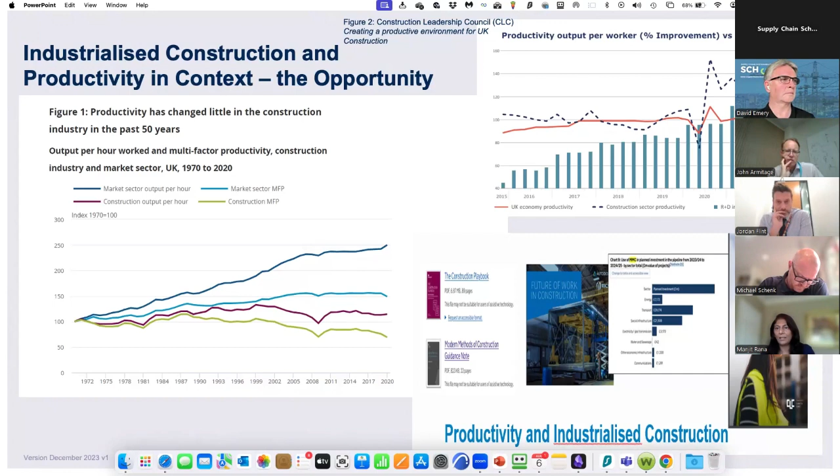Thank you, David. The second thing I wanted to go into a little bit around the whole productivity and industrialised construction piece is one of the issues we have, having the industry that we have, which is large and covers lots of different types of infrastructure. We need to set the right environment to be able to adapt to industrialised construction and bring modern methods of construction in. So the CLC have picked out 3 key areas where we need to work differently.

The first one is around people, culture and mindset, and moving away from the traditional way of doing things, thinking more widely around how value is contributed at each stage of our process, each point of our value chain. The second one is that we need to really embed our best practices and drive continuous improvement.

One of the areas where we can probably do better and need to be more adaptable is around extrapolating all the good innovations we have in our industry and putting them out to other projects, and not just stopping project by project, but really thinking and challenging ourselves about whether we're taking things into other projects and thinking programmatically.

And the third one is, at what point are we adding the value? Do we really understand our value chain and our end-to-end process? Are we bringing the innovations in at the right point? John's going to tell you a little bit more about this later on, in terms of whether we're bringing all the innovations in at the design stage, and whether we're looking and optimizing those areas where we can bring modern methods of construction in at the right point - or are we losing value, and at what point are we losing that value?

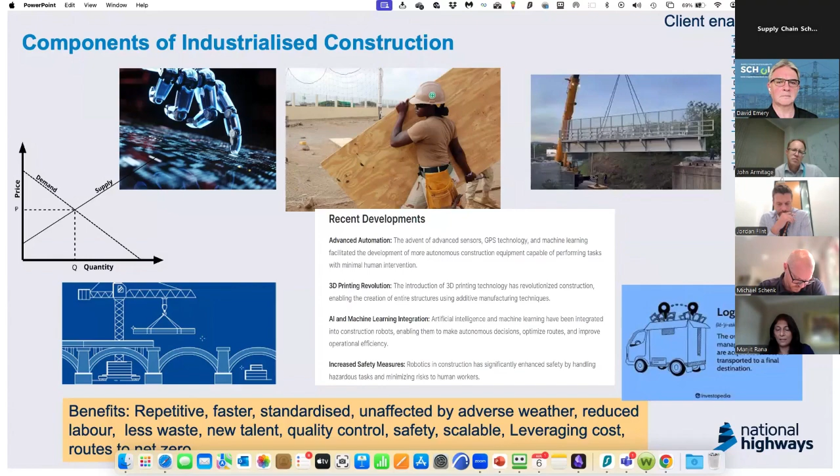Also this morning, for example, I read about a piece that came out around plastic waste and packaging in our industry. If we did more things off-site and worked differently, could we be removing some more of that packaging? The figure I saw this morning was that we have 15% higher plastic waste and packaging in our industry than other European countries do. That's a challenge that we all know we have to respond to.

So if you could go to the next slide, please, David. Finally, I just wanted to say, talking about the language again, we have as a group put into place a 7-category framework where we can start looking at our language and hanging our work off these different areas and different categories.

So we want to do some work around that, and John's going to bring this to life in a little bit for you. Thanks, David.

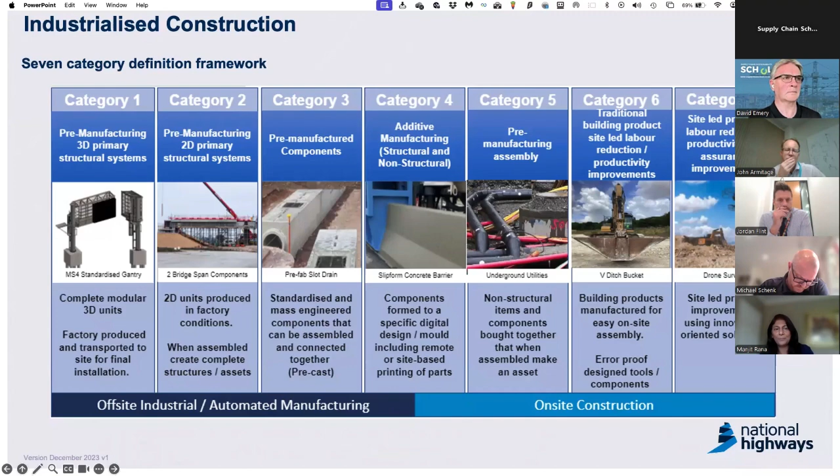Thanks, Manjit. So what we thought, audience, at this stage, if you've still got your phones in your hand, I'm going to move the Menti forwards, and we'd like you to be thinking about what might be the barriers or difficulties or challenges that you perceive if, as a sector, we transition towards adopting modern methods of construction, digital construction, and so on. Now I'm going to take the screen share away from this slide, but it'll still be open on your phones. Take your time to have a think about that, put in some of your thoughts, and we'll revisit this towards the end of the session. So although it'll disappear off your screen now, it'll stay on your phone and you can continue to work on that. So thank you, Manjit.

And as Manjit said, we're now going to have a word from John Armitage from Ramboll, who's going to talk more about the way we categorize different MMC systems, products, and so on.

Yeah, so we have 7 categories for MMC, which have come through from the Ministry of Housing, Communities and Local Government. But I think they've been quite focused on the building market for a while. What we've done through working with National Highways and others is to look at how those categories reflect. Manjit's just shown the categorization that's been done. What I was hoping to do is show a few more detailed examples. It's important not to get hung up too much on what goes in what category, because there's quite a few things that could go in more than one category. But actually it's a good framework to help drive change in the industry.

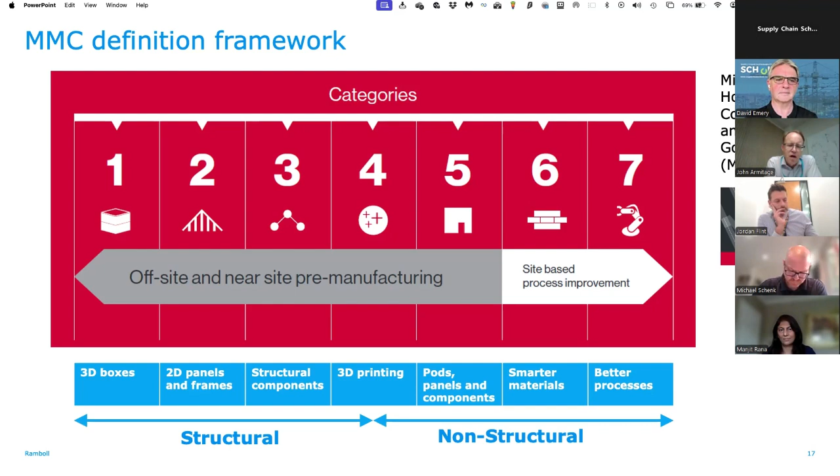Okay, next slide. So out of those 7 categories, we have 4 structural categories, and there's a range of different items that could go into this. Category 1 is complete modular 3D units. The example I've got is a very large modular unit, the M42 overbridge that was moved in for HS2, which is one very large 3D unit. But also we've got things such as MS4 standard gantries. So that's one item - the pre-assembly of a complete unit.

Category 2 drifts more into 2D primary structural elements, and there's actually quite a lot of these that are used commonly. We've got precast arches, culverts, units, precast portal frames. I've got a rail example there for some precast arches that we use down in Bermondsey in London. It's using these 2D systems to form complete structures when they're assembled.

Category 3 moves into pre-manufactured components - mass engineered components connected together. We could be looking at items such as permanent formwork. But the example we've got is the use of precast shell abutments, which have been used in a number of places, ranging from HS2 through to M25 Junction 10, which is currently under construction. That's led to some quite significant improvements in productivity, so that's been very positive.

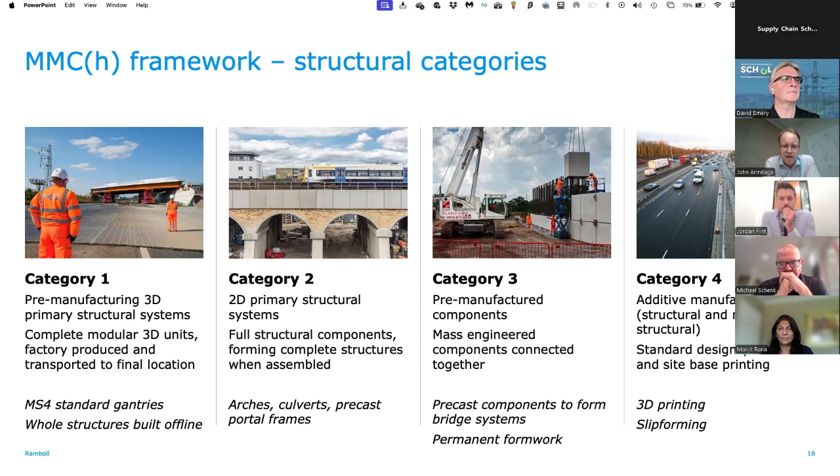Next slide. We then move into non-structural categories. Category 5 is focused on non-structural components, but when they're assembled, they make an asset - a good example is the cabinets used for gantry and ITS, or preformed utilities. Category 6 is the more traditional building products, non-structural elements, but you can get much faster assembly, so cladding units. There was a good example on Manjit's slide of a V-ditch bucket that's used to form things quickly.

Category 7 is the site-led process improvements using innovative oriented solutions - things like drones, robotics, autonomous plant. But again, it's important to think about how early on we can drive those processes in the process. Okay, next.

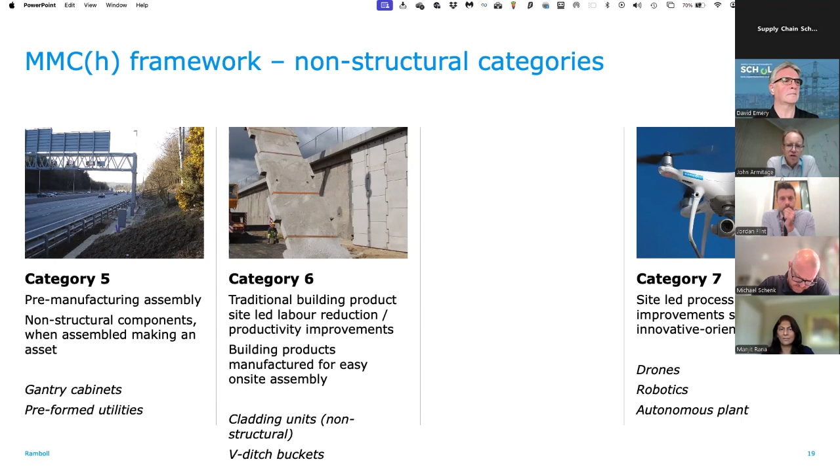So the implications of industrialized construction - many of you will be familiar with the reduced access requirements, less constrained work sites. Reduced number of operatives is very important. Improving program, improved certainty, moving work off the critical path. Reducing costs and increased certainty, and bringing constructability at the heart of the design. Part of that process is this whole idea of planning slow, then the ability to deliver fast - but you've got to get your planning right to be able to deliver fast when you get there. We then get a big advantage: the ability to learn, improve, and then repeat.

When we've been designing stuff bespoke for many years, it's much harder to get that learning process into place. Whereas now we're seeing that we can get the learning process in when we're following industrialized construction. A big thing mentioned earlier was about improving productivity - to get there, a lot of the work has to happen prior to construction itself.

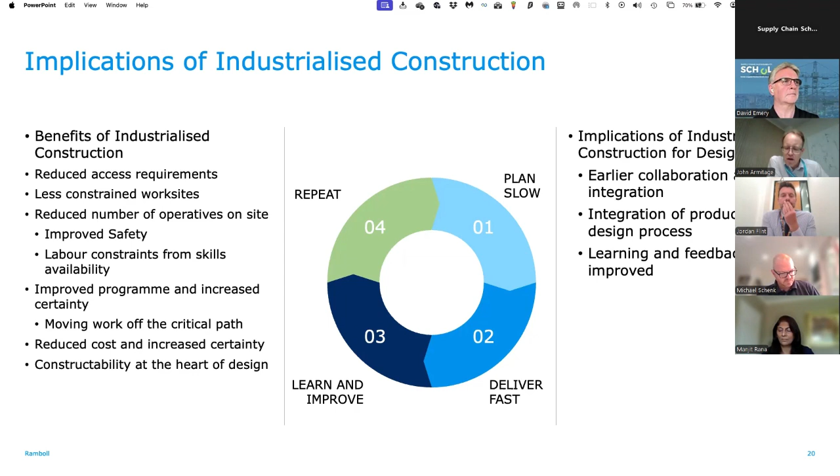So what we're seeing in terms of implications of industrialized construction for design is earlier collaboration and integration. You need that early work to come together. It's integrating products into the design process, and bringing that learning and feedback in. Also highlighted was having the right people, the right culture, and the right mindsets, and how we develop that. Very important to see how design comes through and influences it.

Okay, thank you, John. So I'll just move over to the next slide on the Menti. I can see that some of you have already identified some barriers and challenges.

Question 2 asks you to think about what you perceive as some of the benefits. While you're thinking about that, a couple of comments on John's presentation. One is that he ran through the categories and said let's not get hung up on this - and I absolutely agree. But nevertheless, I think the categories are extremely useful for us to understand what a broad church this is when we talk about MMC.

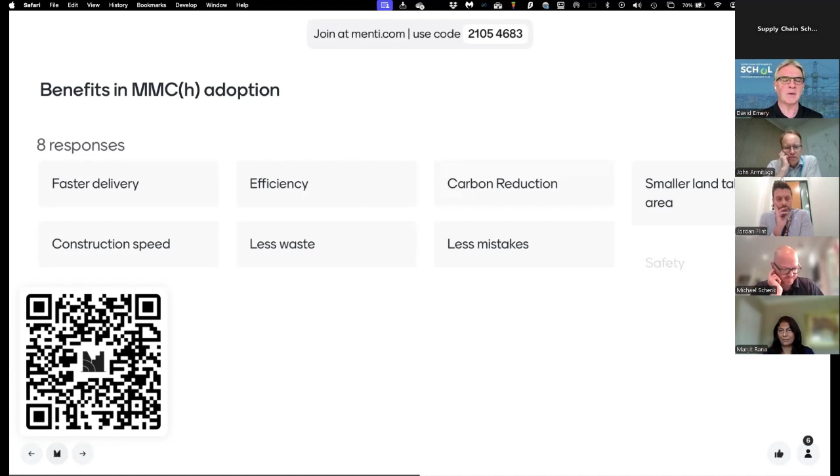Of the dozens of MMC and offsite workshops I've run with hundreds of attendees, very often I'll go through the categories then do a little fun quiz - what category do you think this system or component fits into? I've never yet had any audience answer every question correctly. So on one hand, it's great that we're trying to understand what we mean by it, but on the other hand, don't get too uptight if you can't easily categorize something.

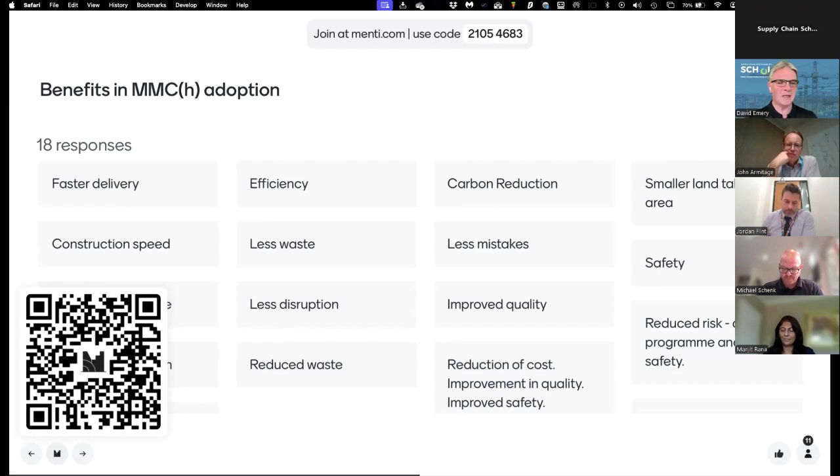The second point I wanted to make was, John, you referred to industrialized construction. I know from working with National Highways that this phrase is going to develop - working towards using industrialized construction rather than modern methods of construction, certainly in the infrastructure sector. Finally, I love the diagram you showed us that begins with plan slowly and deliver fast. I think that requires a genuine shift in mindset, that we shouldn't just rush in and do what we've always done. Let's step back, take time to plan this project, and doubtless the delivery will benefit from that strategy.

So thank you, John. I'm going to now hand over to Michael from Balfour Beatty, and you're going to talk about sharing your approach to adoption of MMCH.

Yes, hello everybody. So you can click through about 6 times on this one, David, to start with. Just a couple of points based on what John was saying and what David just said. I think one of the biggest pieces around how we move towards this umbrella term of industrialized construction - and I'm going to use it as the umbrella - is that we have lots of methods that sit underneath it in terms of the categories and the way we go to work, is the way I like to look at it.

Because when you think about it, when we're looking at a project level, it's all about integration. So whether you're at a product base, or a component base, or a structural base, it's all about integration. That's the industrialized piece that asks how do we do it end to end. But as individual contractors or product owners, you might not use the word industrialized construction, but you might be talking about the methods and modern pieces that you do.

I think the other part is the word modern method can also be confusing in some regards, because actually some of the methods we're talking about aren't actually modern - we've been doing it for decades. But what we try to start to think about is how we bring all this stuff into how we go to work.

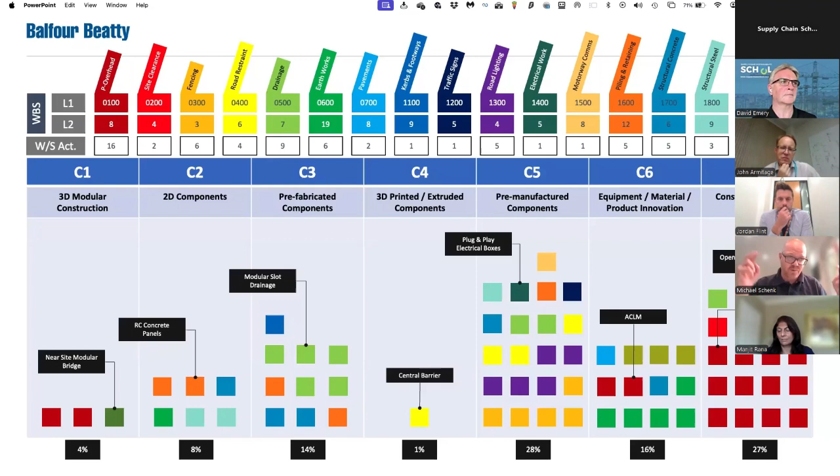When you talk about just the 7 categories, it is literally just that - we've put something into a box and said, great, we're modern method. If you go onto the next slide for me, David.

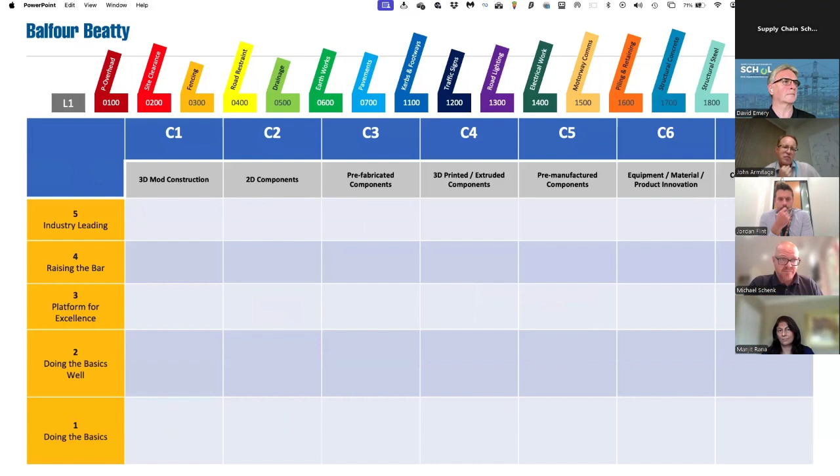As part of some of the work we've been doing with National Highways, we started thinking slightly differently, asking how do we supercharge this idea of the 7 category framework and make it really valuable to how we go to work. What you find is we have levels of improvement, and someone will say a precast concrete chamber isn't modern method, but it is - there are multiple ways to look at it.

What we say is that's you doing your basics - just componentization, repetition, and standardization and so forth. That's level 1. But then with the likes of carbon coming in, and new materials starting to develop and change the way a precast unit is made, you might have a low carbon concrete versus a traditional mixed concrete, and your carbon footprint's better.

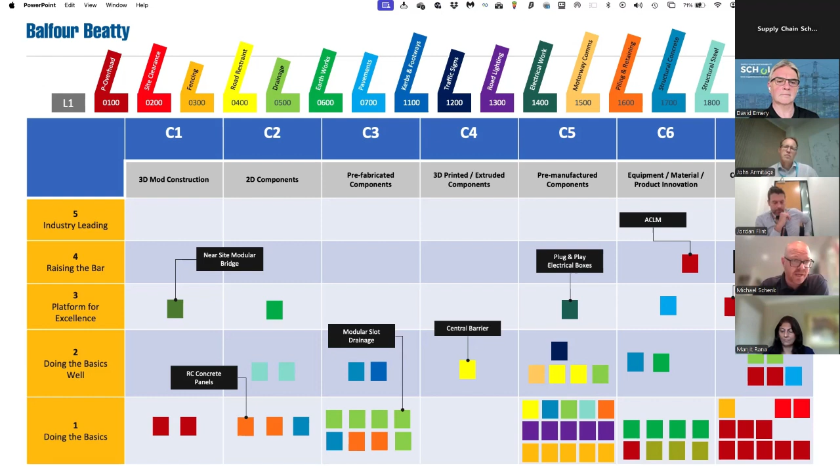The next example shows how this enables us to challenge areas you wouldn't think were even in the space of modern methods - for example, earthworks. It's a category in the WBS structure, and you might say we don't do much there because it's not offsite manufactured. But this is where we look at the equipment we use and challenge the norm. Things like the V-ditch bucket or the earthworks blade might be the basics. Then you throw in 3D machine control, using digital capabilities to help drive how we move material around. Then you go into remote control, then full automation. Suddenly we are modern-methodizing earthwork movement.

So as a group, we feel this type of model drives a lot more opportunity than just saying let's go build a building out of panels or concrete. It gives us the ability to challenge at every level to see improvement across the board. That's the vertical improvement, but then there's the potential for sideways movement.

We've mentioned a couple already - our VRS system, steel barrier systems. They're all components, they all come to site, they're all assembled. But when you start combining those things and putting them onto a platform, you can get something like the Smart Raft, a 3D structural component, which is a product you can go out and buy now. Some of this is available to us. Then you think about what other things you can put on that platform - lighting columns, comms cabinets, whatever it might be.

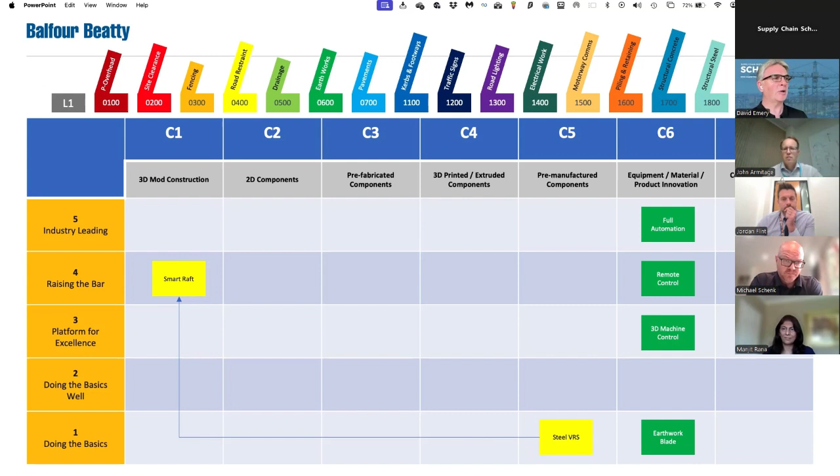And what I think you've shown, Michael, is a great example of that, about how you might think through a problem and come up with an innovation. So thank you for that.

What I'm going to do now is move on to the next Menti question. What we'd like to know from you now is, what can the supply chain do to help overcome some of the barriers that you may have identified earlier on? We will take time to go through all your responses on the Menti, but I'm going to leave that question open on your telephone for you to have a think about and have a go at answering.

Meanwhile, I'll go back to the slide deck and go over to Jordan Flint from Kier, who's going to talk through some of the ways the industry is responding and contributing to this industrialized construction mindset. The floor is yours, Jordan.

Brilliant. Hopefully I'm coming through okay. Loud and clear. Perfect. Hello, everyone. Again, hope everyone's doing well. Yeah, some good presentations there.

So I'm going to build on some of the discussion and the presentations so far. It was really interesting to see Manjit's presentation, and I think the work that Michael has brought forward from Balfour's to look at how we shift vertically is really interesting and gives us a focus to do that.

I think the reality is we all do MMC, industrialised construction, in different ways. So we're all doing it as part of our day job, but actually capturing it and then trying to turbocharge it is a really good thing.

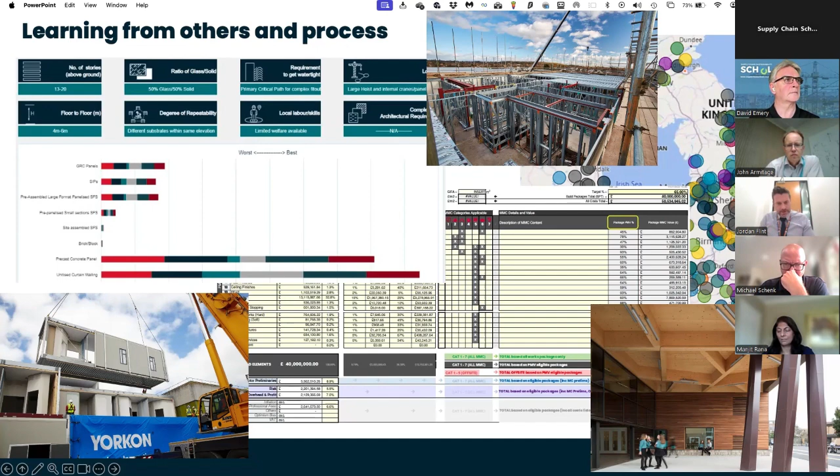So a lot of our projects now will start off with a very early workshop on each project that looks and prompts us to really drive some of the MMC ideas through. So the work Michael shared there is a big part of it, that we consider those areas, and it prompts us to drive some of those areas through. David, next slide.

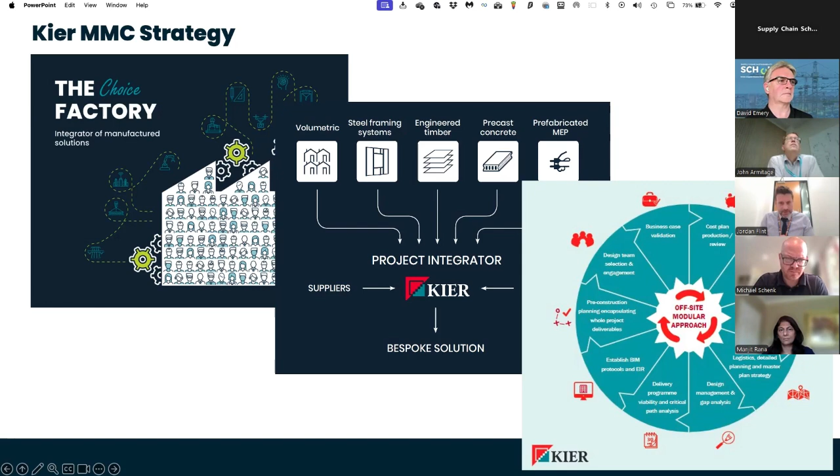Within Kier, and again, probably not necessarily just Kier, but we've got a brand that helps us drive our MMC strategy called the Choice Factory, and it's relatively straightforward, but it's a central place that we keep all of our strategy documents, case studies, tools that helps to really pull together our whole strategy. This is across the building sector, highways, and this is work that we're sharing with our National Highways colleagues and our supply chain. It sets out really good ways that we're working with our partners across the board. David, next slide.

Last but not least, just a couple of examples really of where we're trying to utilise some of this strategy. So we did lots of good work on the Mersey Gateway, smart motorways projects. There was some really good benefits across the board for National Highways and the supply chain of really trying to drive modern methods of construction in how we install our drainage units, how we lay the pavement, and trying to get really improved benefits.

Lots of work on HS2 around highways of how we deliver structures, but then also on the smaller scale, bottom right, looking at ways of really using precast elements to replace bridges more effectively without disturbance. This is our M6 Lune Gorge project, where we're looking at precast solutions within an existing bridge to avoid the need to close the M6 for long periods of time.

We're doing, and then in the bottom right, lining schemes to again avoid removing existing bridges and causing lots of problems for the members of the public. So lots of different ideas going on, but it's really overall a good collaboration between National Highways and the supply chain that we're all inputted into. So that's it from me, David.

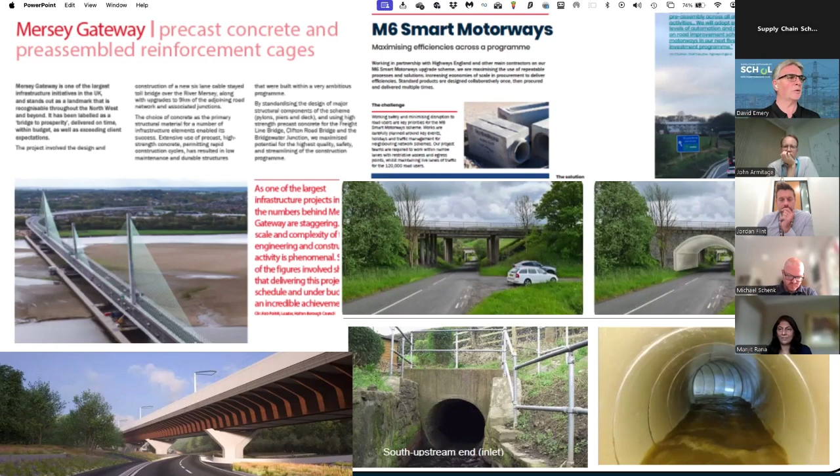So in the last 2 years, the school has written 2 reports about how we feel that offsite construction can actually help enhance social value on projects, which is sort of counterintuitive because you're taking work away from the local construction area into a remote factory. Nevertheless, we believe there are ways that MMC delivers social value. Last year, we wrote a report on how we believe MMC can help drive down carbon in construction and infrastructure projects. And this year, I'm about to launch in October a report that I'm writing, which is based on the dissertation I wrote for my MSc in offsite construction, which is all around the well-being benefits to the workforce in using modern methods of construction. So really pleased, Jordan, that you mentioned values in the plural there. So thank you for that.

Whilst you're just working on those Menti questions, audience, we want to go to the Q&A session now. But before we get into that, I'm going to leave you one last question to answer on the Menti, which is that I know National Highways is very keen to articulate some of the benefits and strategies and innovations that they have in mind. What, as an audience, suits you best in terms of the format for this type of event? You can use your phone to rate these in order of preference, from short form webinars such as this of an hour or so duration, whether we just communicate with you through email or newsletters or similar, whether we do live face-to-face conferences or whether virtual conferences in a more extended version of what you're seeing today.

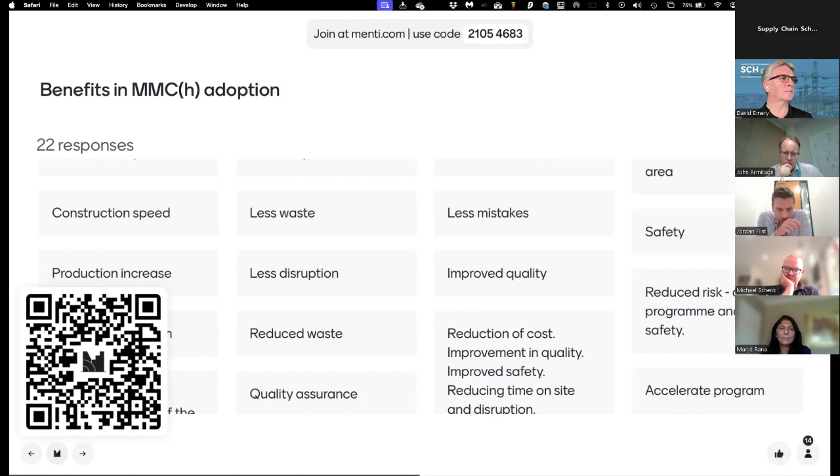I think I agree with them all. Are there any that the audience has missed? Not particularly. I'm sorry, my internet might have cut out a little bit earlier on, so sorry about that.

But just a quick one - I've not seen customer yet, but I think that builds into the programme. Nationally, maintaining the network is a really difficult exercise to keep the roads moving. So where we talk about faster programme, that all goes hand in hand with reducing customer impact. That's a big part of what we want to try and achieve through some of these approaches, I think.

Yeah, I think - sorry, David - there's another bit, to make sure we're not driving to the lowest price possible, which is great, but that's not what National Highways wants as such. And I think some of this stuff has tangible benefits and intangible benefits.

We'll talk about lots of these things, but have we done enough to capture, record, and demonstrate each of these to make it easier for those signing off in procurement teams, on ways of working or supply chain, to show whether this stuff is in the cost or not? Some of this - like safety - isn't a cost you see on the bottom line. It's not written there to say we're not going to kill people. That's our license to operate, and how we become safer in how we go to work, by doing things off-site or near-site or in a modular way. You don't always get that in the price.